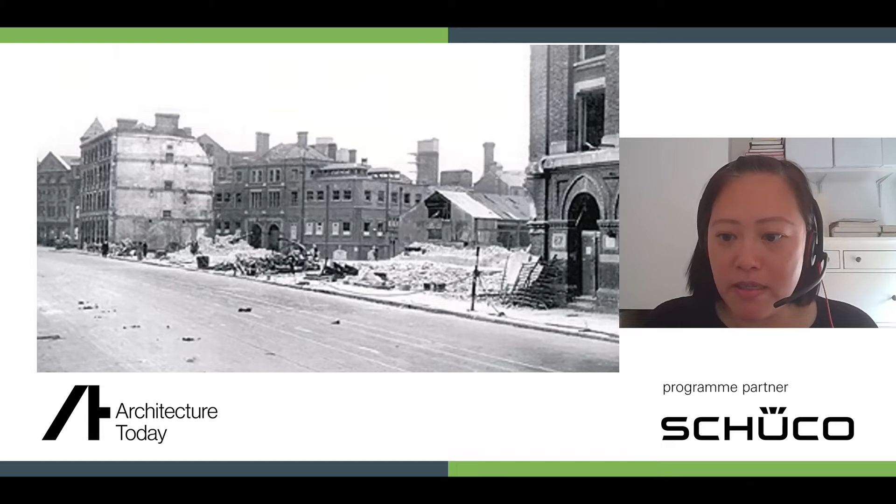and the second a Victorian warehouse with its exposed Victorian brickwork. The third to its rear is a cross-laminated timber building built in 2015. It goes to show that the binary approach of conservation versus decarbonisation would not be a straightforward debate.

When Architecture Today invited me here to speak, I asked myself how I can contribute to this discussion. After all, I'm a practitioner, learning daily from the experts around me, and do not purport sustainability as my expertise.

From a young age, I had a sense of material use and waste, and I was cultured to be a thrifty person growing up with my grandmother and her practice of saving tin cans for storage and reuse of pots for growing. I was taught how much energy and resources goes into making something, and that reuse was paramount. That same consciousness carries through to my work 40 years later.

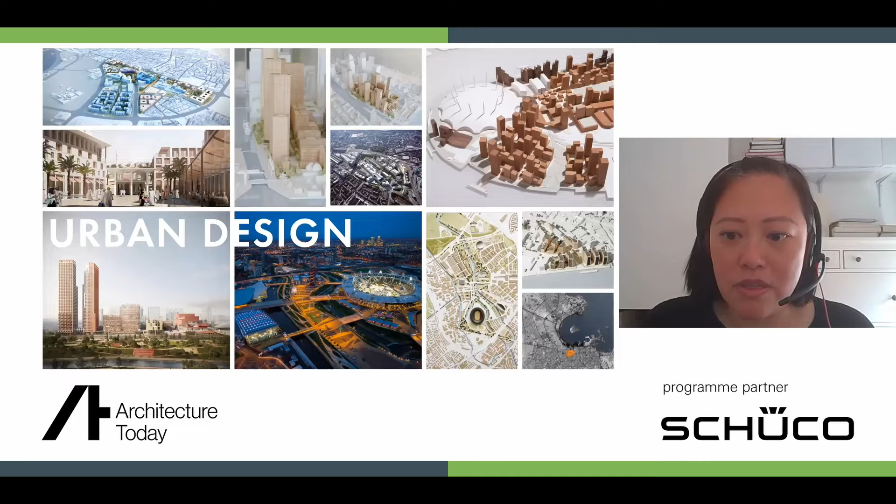The question of whether something is necessary and if something is of value, should it be retained, and how its use can be extended. Our practice has worked across many sectors, from retained to new, garnering over 42 RIBA awards. My work over the last few years has primarily been in urban design, residentials, and workspace.

From Imperial College, Greenwich, Brent Cross, and King's Cross, I've seen through my work that design is not just a carbon issue, but social and financial considerations too. The King's Cross Master Plan touches on many of these themes.

Though it once was a thriving hub for goods and transport, by the 1980s, it was a disconnected and derelict piece of city, making getting through and to it difficult and unpleasant despite being in the center of London. Working with Argent and Dimitri Porphyrios, the master plan sought to bring back a more sustainable and intensive plan, with walkable places and infrastructure that can extend its lifetime.

Just like the Victorian infrastructure, the green spaces and network of streets and the upgraded services below, it aspires not just to be of the 60-year typical lifespan, but to 200 years of investment. The plan also sought to retain existing buildings that are of value to continuing its living history.

I worked on the early stages of the German Gymnasium, built in 1866. It is a key piece of British history. I learned of its cultural value as a site of the Olympian athletes showcasing sport within London.

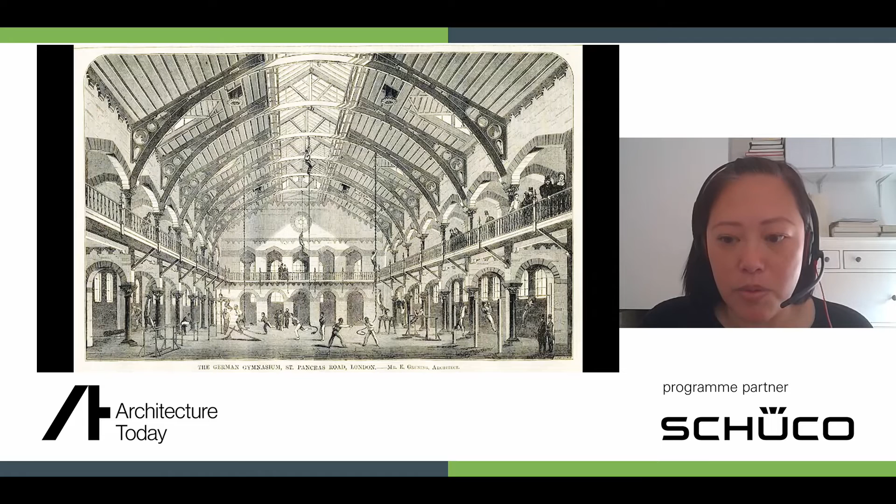Through careful documentation, repair, and adaptation, we renewed its use. It is now a restaurant showcasing German cuisine for all to enjoy. And it also activates a key public square outside King's Cross Station.

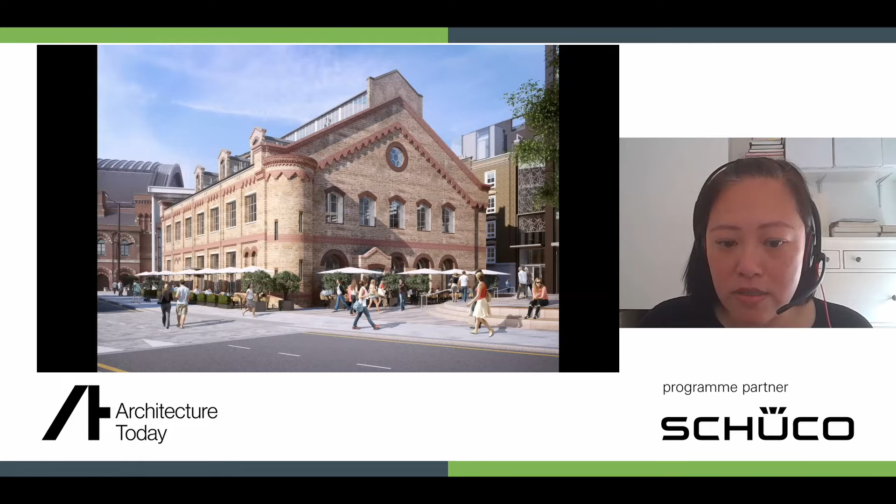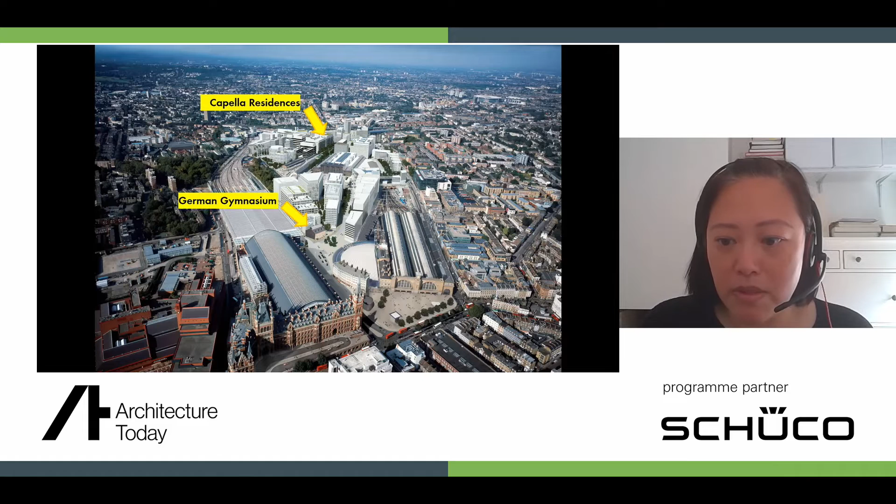20 years after the inception of the master plan, I now lead a project team designing the last building of King's Cross. It is a new residential building that will provide 176 homes for residents on the site. The building is designed to use 100% renewable energy through green gas and electricity, becoming a carbon neutral estate.

The scheme is designed to BREEAM Excellent with Code for Sustainable Homes Level 4 requirements for responsible sourcing, site waste management, and efficient material use through prefabrication. It also uses WELL guidance for ensuring good access to green space, daylight, sunlight, and ventilation.

These performance measures are sometimes harder to achieve with retained buildings, and given in this context where the site previously held derelict sheds, the new building provides a new life and homes to the site for many decades to come.

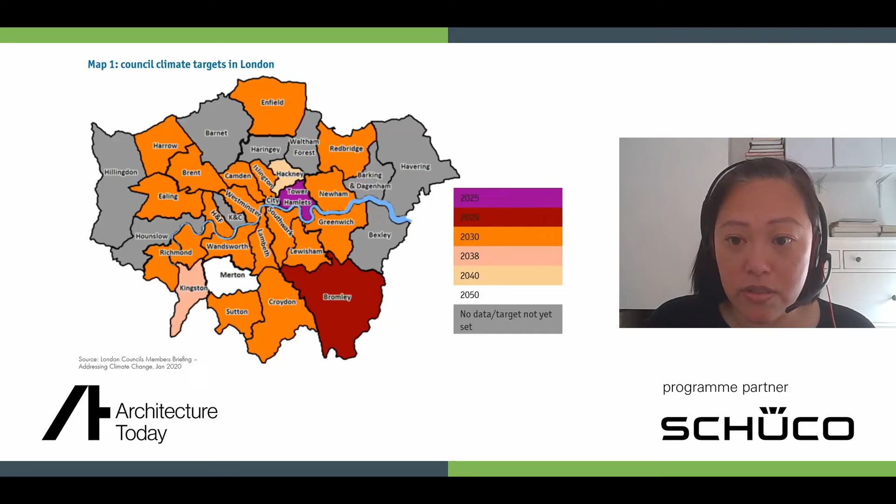Around 300 councils have declared a climate emergency to reduce their own carbon emissions and to take part in climate change. Retention and reuse may be a solution advocated, but its true impact and cost is not always understood. Retrofit is decades old. Allies and Morrison have been engaged in retrofit for 30 years, and it comes in varying degrees.

The different shearing layers of construction have different lifespans. It is not just a question of old or new, but degrees upon which one should approach a site, and it involves analysis of its social, environmental, and material legacy. Reuse can span from retention of facade, its superstructure, upgrade of its systems, or its cultural assets.

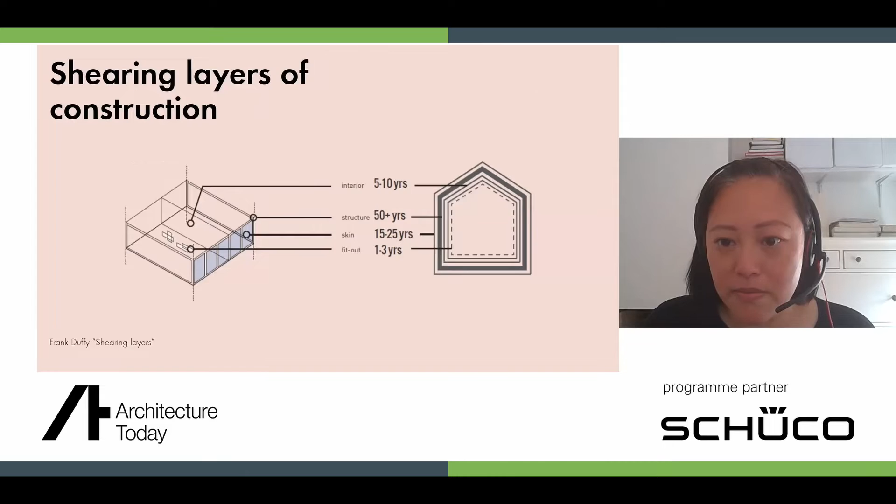Like our crane building, which had a facade replacement, or our work at Royal Festival Hall, which was much more involved. This is not an easy task, so our work is informed by the LETI Guide, by the London Energy Transformation Initiative, which our head of sustainability at Allies & Morrison, James Woodall, leads in our contribution to support its transition from London built environment to net zero carbon.

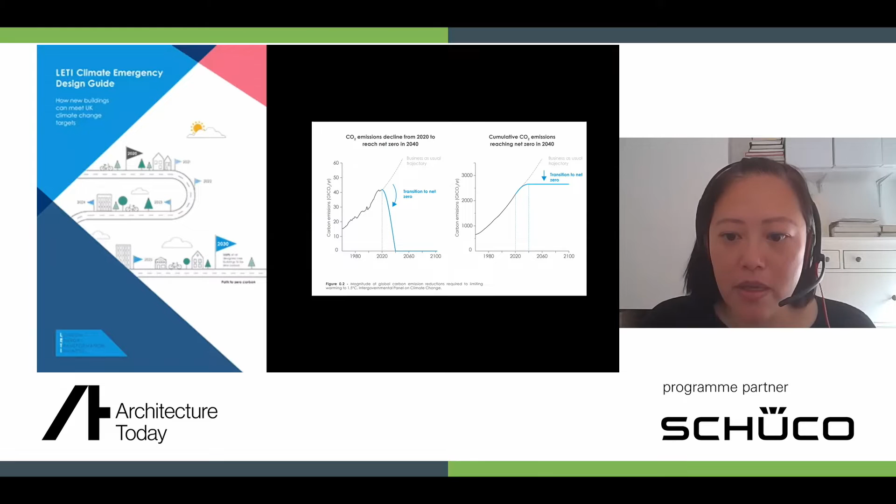The key is whether the carbon payback is achievable in 10 years to limit global temperatures from exceeding 1.5 degrees above pre-industrial level. One is always aware of the impact of new construction and the emissions for demolition.

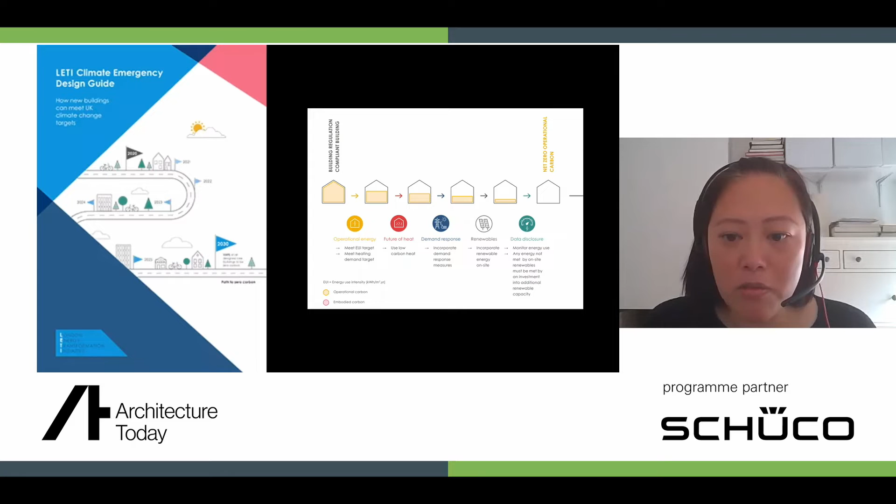When approaching a new project, we review the context and the existing buildings if it's there. There is always a dilemma of whether the extent of design life of either the retained components or the proposed new build will last. And will it be best practice for embodied carbon, but also is its operational carbon in line with climate change targets?

We have a duty to ensure buildings do not become prematurely obsolete, protecting these assets and assessing whether they're resilient to future change. It's really important. Allies & Morrison have invested in this duty with the creation of our upfront carbon tool. This not only allows us to calculate the environmental impacts associated with new development, but also an ability to view this impact against a retrofit option where existing buildings exist.

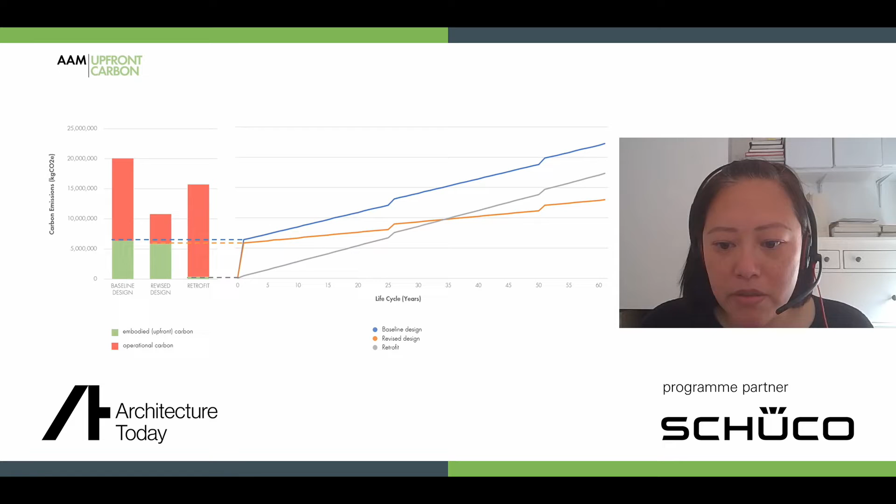We have a role to play to assist our clients in setting briefs and strategies, to prompt our design teams and outline to planners, stakeholders and policymakers what to expect. If after analysis, new, to whatever degree, is a solution, then we, designers, consultants, clients, and councils, should be held to the highest standards to maximize its efficiency, its social value, and its responsible use, to ensure it is a positive investment that lasts for future generations and the planet.

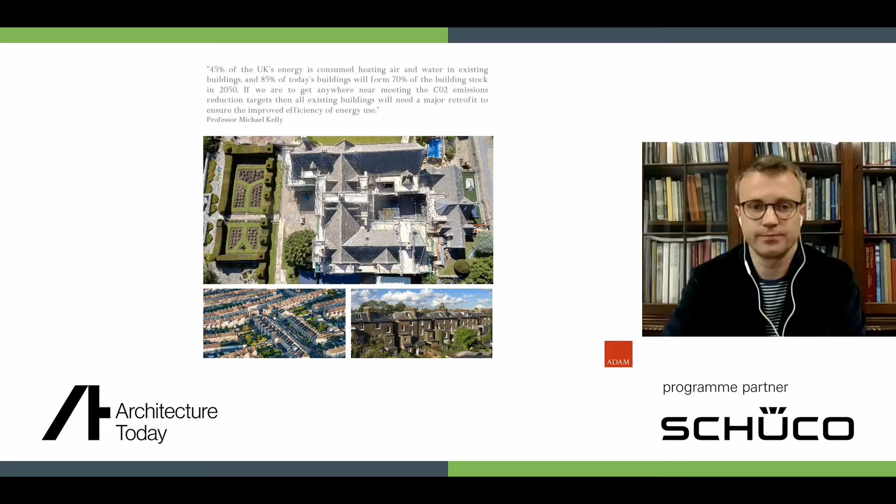This is a Grade 2-star manor house in the Cotswolds, and I show this as an example of how we can upgrade a historic building for the future, and how adaptability for renewables and a changing energy supply can be achieved. This is a private home dating back to the 15th century, and it'd been on the market for some time. It looked as though it might not even get sold, and it could potentially fall into disrepair.

An overseas client saw an opportunity to purchase and convert from a private home into a private institution. For those less familiar with the uses, the institutional use meant that they could still use the property as a private home, but they had the benefit that it could also be used as a quiet retreat for guests of the clients and also their foundation, which promotes the arts and sciences.

We took a fabric-first approach, which included major repairs, removal of asbestos, and modifications to the layout to undo generations of incremental change, which quite frankly resulted in a pretty confusing experience. We undertook a staggering amount of historical research, dating the property, understanding its incremental phasing, and more historically significant interventions. The most recent works had been carried out in 1925. It was our mission to understand and fully evaluate the building before developing early design. The building became the client.

From a practical perspective, historic projects also provide a testing ground for interventions, contributing to thought leadership, research and development. It's a balance of protecting the historical significance, but also securing its future to ensure it can survive.

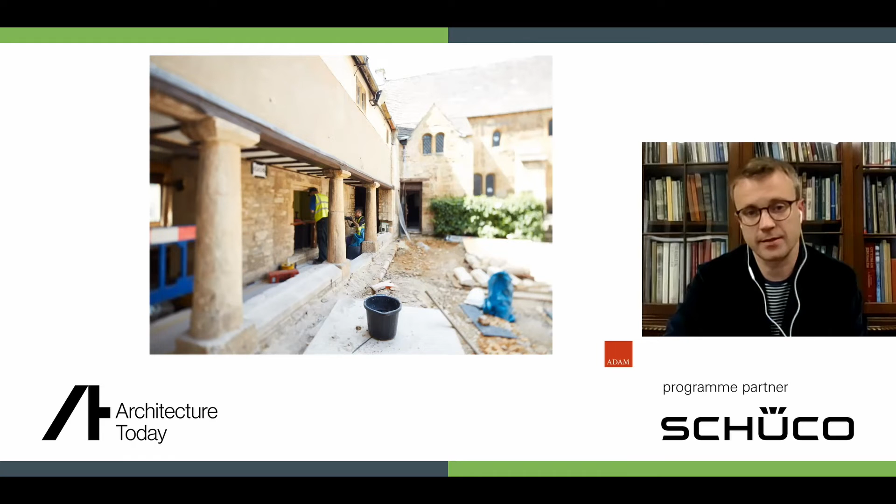So to conclude, my position is that conservation can be hugely beneficial to working towards net zero, and the lessons learned from upgrading the large historically important buildings can be applied to the 85% of the existing buildings which are likely to be with us in 2050. I'd like to see us talking about avoided carbon, discussed alongside embodied carbon and operational carbon, and quantified with the same amount of importance.

Nobody wants to be in a bad building, and it's a question of huge balance. But we need to understand the carbon cost of replacing poorly performing buildings with incredibly energy efficient buildings. If this takes us beyond the tipping point and we look at the timeline of the carbon payback, it's a little bit concerning if we're in a position where we're already in a climate catastrophe. This is why it's been said, and I'll say it again here, we can often think of the existing buildings as being the greenest buildings.

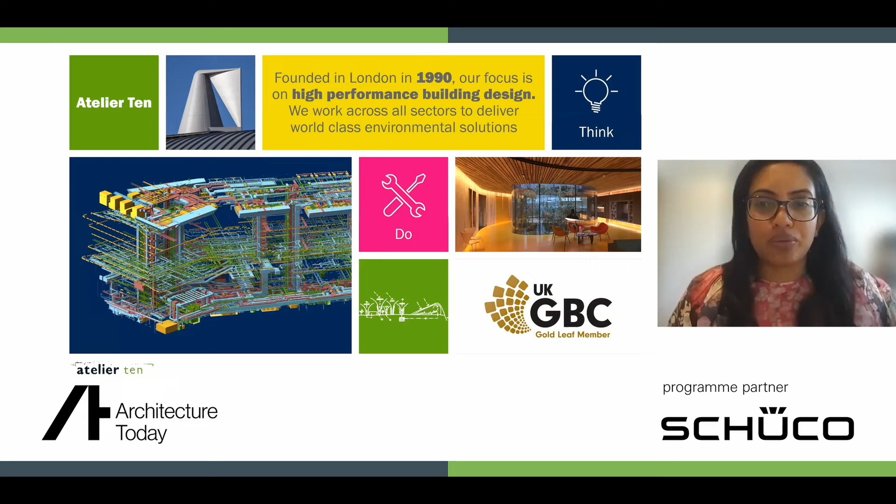So welcome today. My name is Geeta and I'll be speaking on behalf of Atelier Ten on adapt and reuse: conservation versus decarbonisation. So Atelier Ten was founded in London in 1990. Our focus is on high performance building design. We work across all sectors to deliver world-class environmental solutions. Each year we offset 100% of our CO2 emissions as a company. We are also a Gold Leaf member of the UK GBC as well.

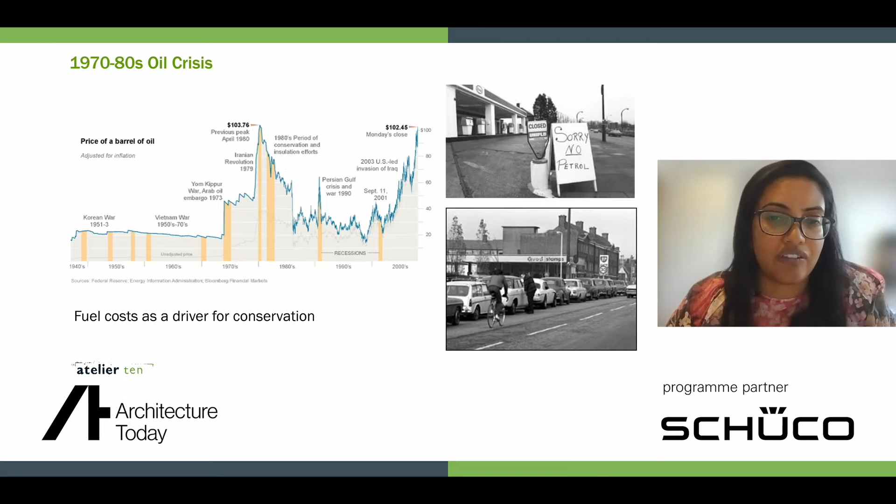So in 1972, if the present growth trends in world population, industrialization, pollution, food production, and resource depletion continued unchanged, the limits to growth on the planet would be reached sometime within the next 100 years. In the 1970s and 1980s, there was the oil crisis, so there was a driver for fuel cost and a driver for conservation of fuel as well.

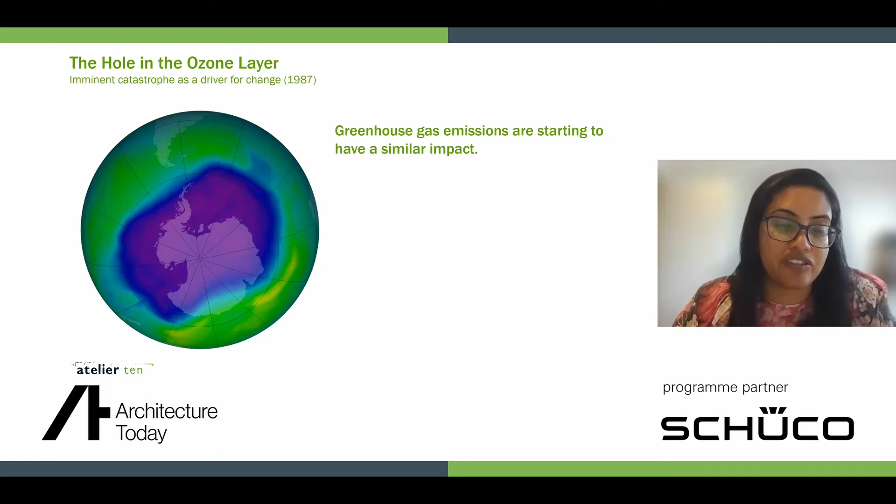So in terms of the hole in the ozone layer, there was an imminent catastrophe as a driver for change in 1987. Greenhouse gas emissions were starting to have a similar impact on the hole in the ozone layer. A new awareness of the impact of humans on the atmosphere was detailed at that time, and the consideration of global warming, GWP, as a key issue was also highlighted. Refrigerants and insulating materials were particularly affected. So change is visible. You can see it today in many parts of the world.

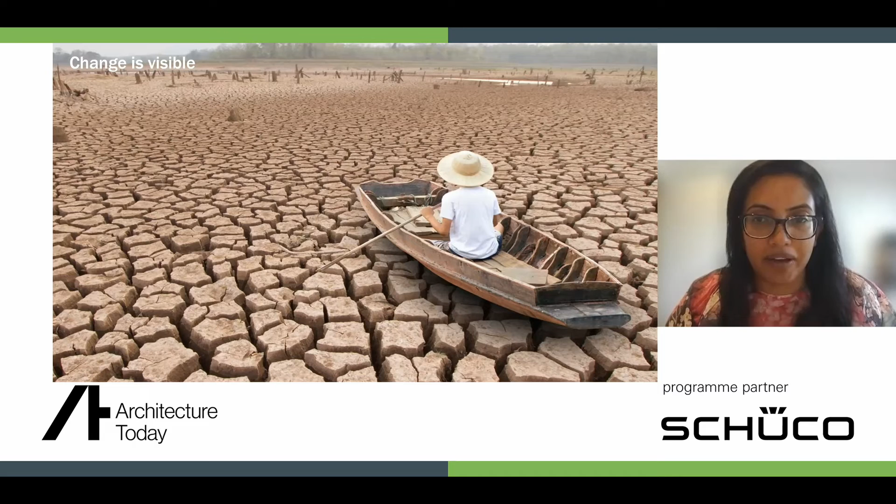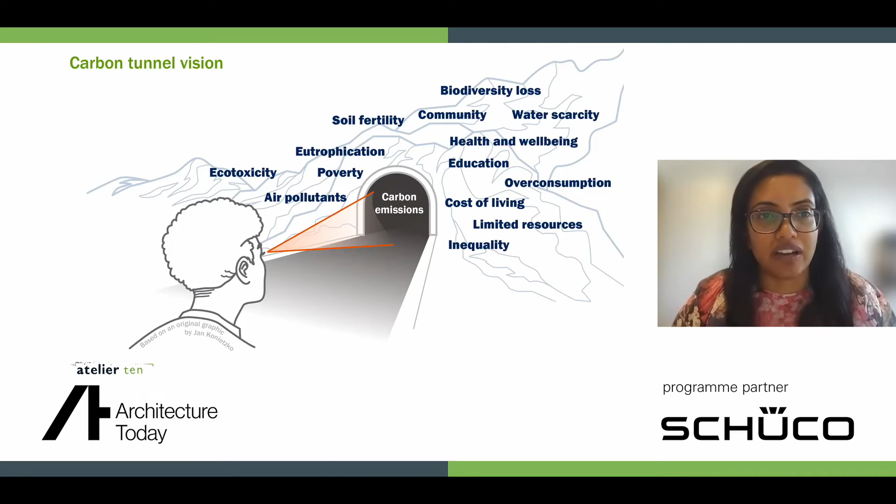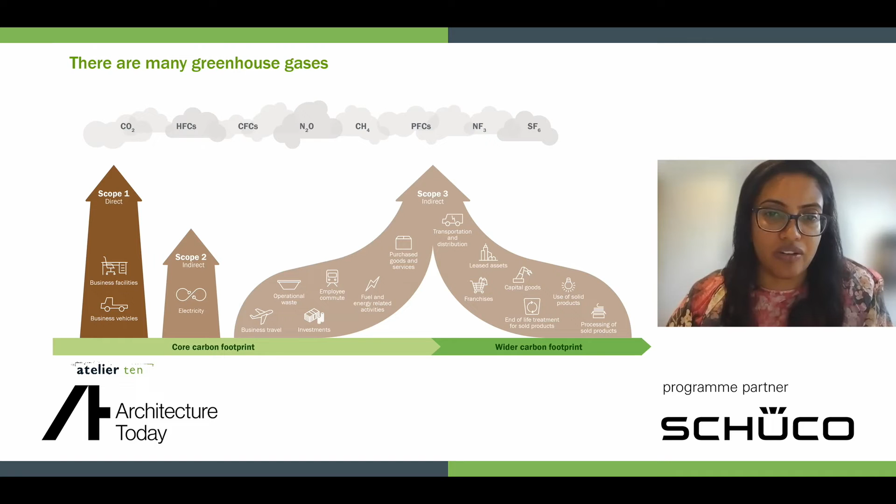So in terms of conservation and decarbonisation, there is no straightforward way of thinking about it. Conservation protocols differ according to the age of a building, the methods and materials used in construction, and specific locational factors. Currently, in terms of carbon emissions, there's a tunnel vision on how to actually equate and look at how you provide a rateable target. There are many greenhouse gases as well. So there are HFCs, CFCs, N2O, CH4, and looking at the whole carbon cycle will help reduce overall carbon factors.

So as a company, we look at embodied carbon. Why do we look at embodied carbon? Embodied carbon is the amount of carbon that's emitted during the construction of a building. The extraction of raw materials, the manufacturing and refinement of materials, transportation, installation, and disposal of all supplies can all produce embodied carbon emissions.

In 2019, the UK government signed a legally binding target to achieve net zero carbon emissions by 2050. 80% of the buildings of 2050 have already been built, so decarbonising these buildings will play a vital role in the UK's journey to net zero carbon. There's no one-size-fits-all approach, but with the range of technologies available today, solutions are there to be found.

The UK GBC has led the way in the UK property sector in defining what we mean by net zero carbon. Its document, Net Zero Carbon Buildings: A Framework Definition, was published in 2019. This defines the principle that achieving net zero is about reducing demand both for energy and materials, with offsetting the last resort for residual emissions.

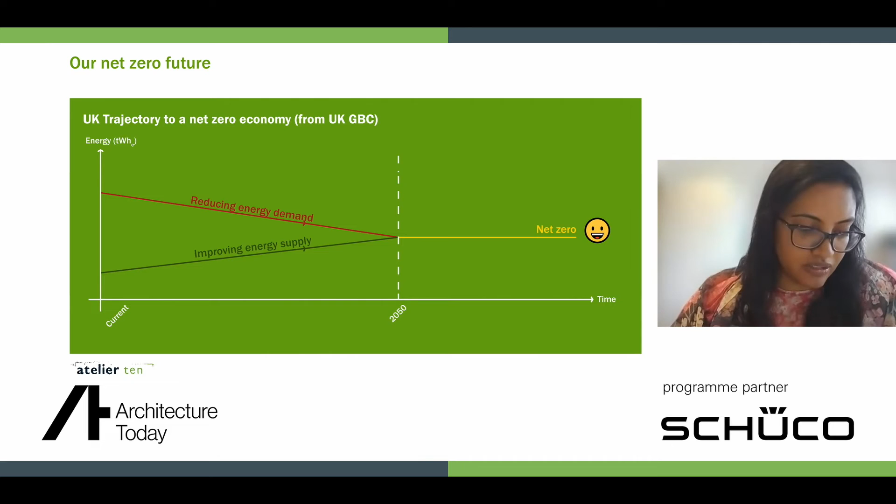The UK GBC defined a target trajectory, as seen on the screen, for operational energy efficiency for commercial offices, which can be applied across the property sector. To be net zero carbon by 2050, we need to reduce our buildings' operational energy use intensity by more than 60%. While the details of the calculation may change over time, the scale of the challenge is very clear.

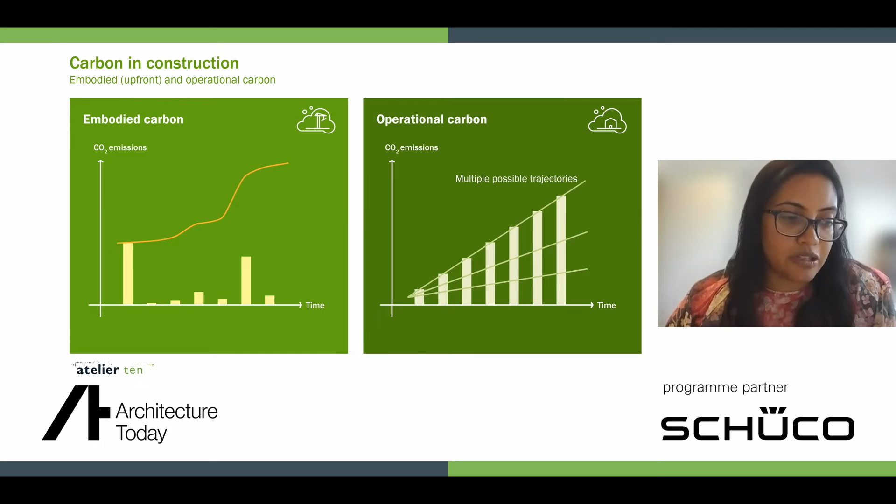So in terms of embodied carbon, which is the upfront carbon that you have to look at, there is also an awareness of operational environmental impacts, which is increasing rapidly among some commercial occupants, particularly larger organizations with internal sustainability commitments. Achieving operational net zero carbon requires a partnership between owners, occupants, and operators. Operational carbon is not just about design; it requires a combination of the right design, facility management, and occupant behaviors.

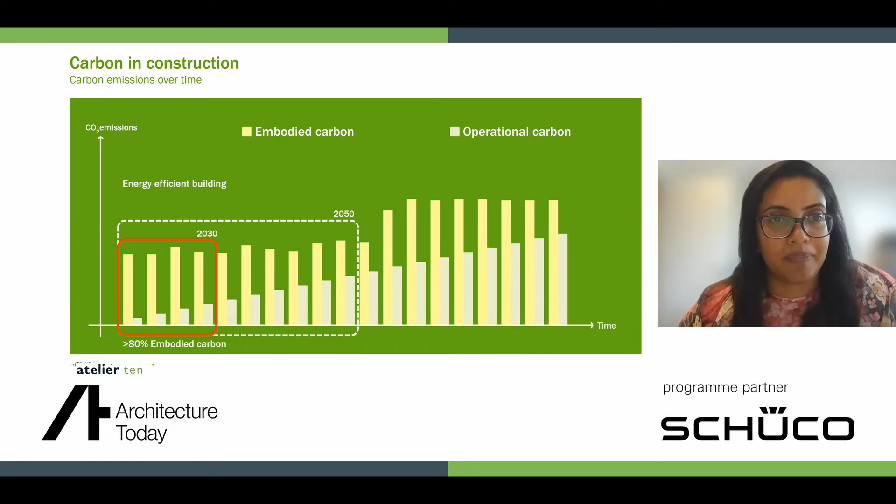So the graph in front of you shows by 2030 the greater than 80% embodied carbon, and how operational carbon and embodied carbon would be targeted over time. So in terms of actually meeting LETI's carbon targets, getting the balances right and avoiding unintended consequences is best done with a holistic approach that uses an understanding of a building and its contents, its significance, and all factors affecting energy use from the starting point to the end,

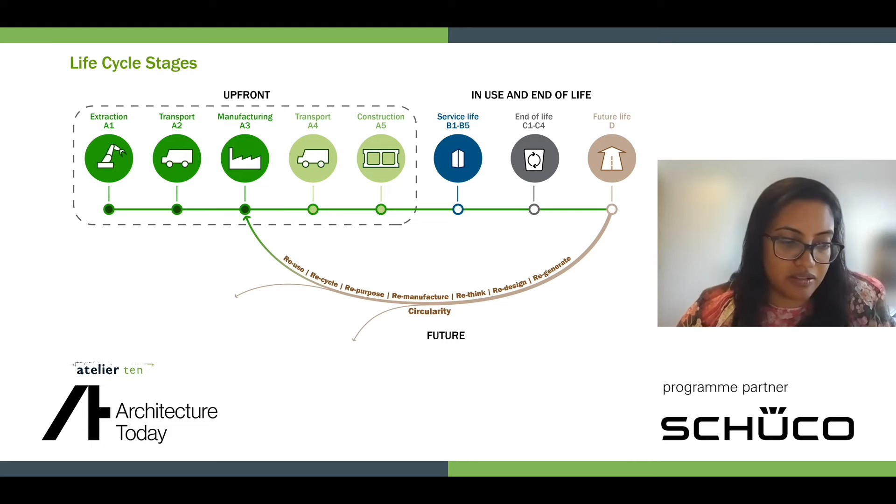and looking at the future as well. A building uses resources such as energy, raw materials, water, etc., which generate waste and are potentially harmful to the atmosphere. Embodied carbon emissions arising from new building constructions or refurbishments can represent a significant portion of a building's whole life carbon impact. The goal is to reduce all carbon emissions to net zero through the life cycle of the project. So some hotspots that you could target as part of embodied carbon are design and optimization, and reducing, reusing, and recycling materials, thus decreasing embodied carbon throughout the life cycle of a project.

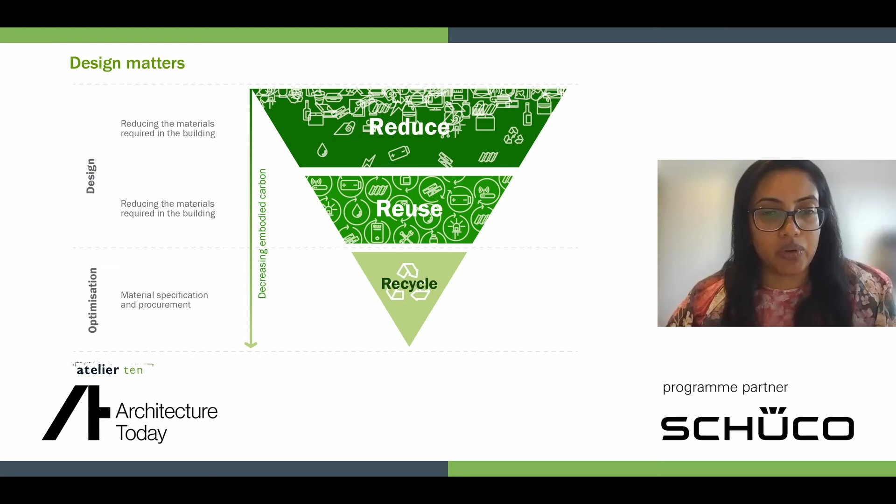So in terms of height, embodied carbon, if you look at height of commercial buildings or reuse of existing commercial buildings, goes up dramatically with the building height as well. Building height influences energy consumption directly through mechanisms such as changes in external temperature, wind speed with altitude, access to daylight, solar gains, as well as the need for lifts.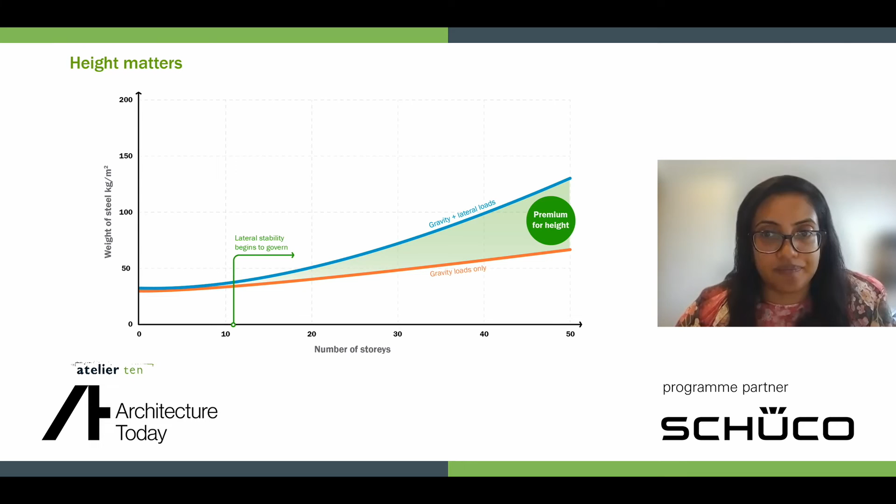So in terms of upfront carbon, how an assessment could be detailed is looked at the MEP, the furniture, fixtures and equipment, finishes, facades, superstructure, temporary works, external works, and substructure. The LETI best practice, Band C, targets 600 kilograms of CO2 emissions per meter squared on the GIA.

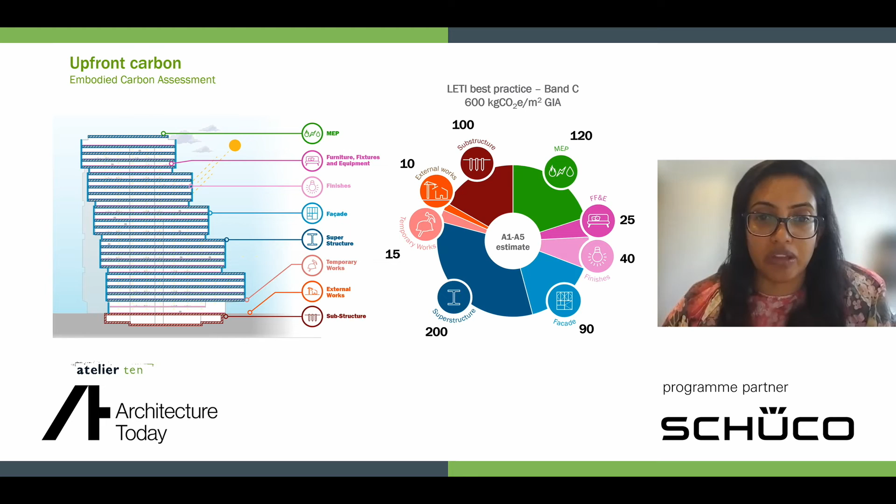So another hotspot to target is structural embodied carbon. So moving the dial on loving columns, specifying low carbon steel, building lightly, reusing, building cleverly, innovating the building, and building efficiently.

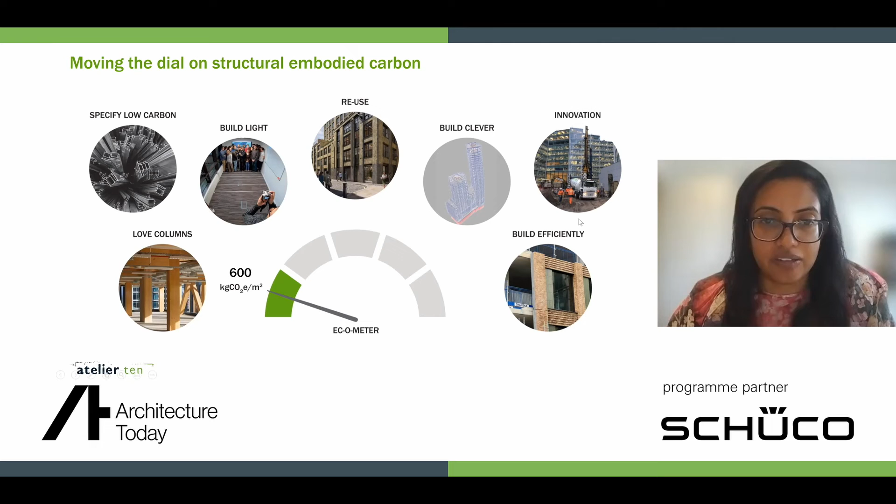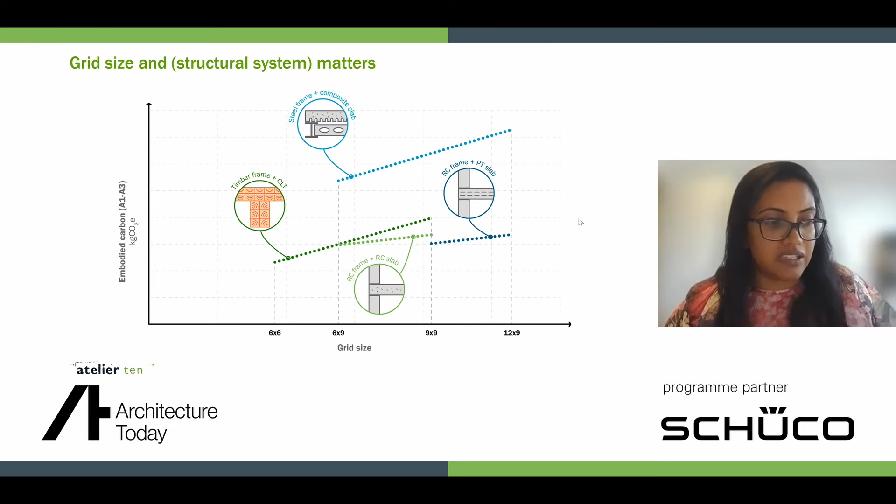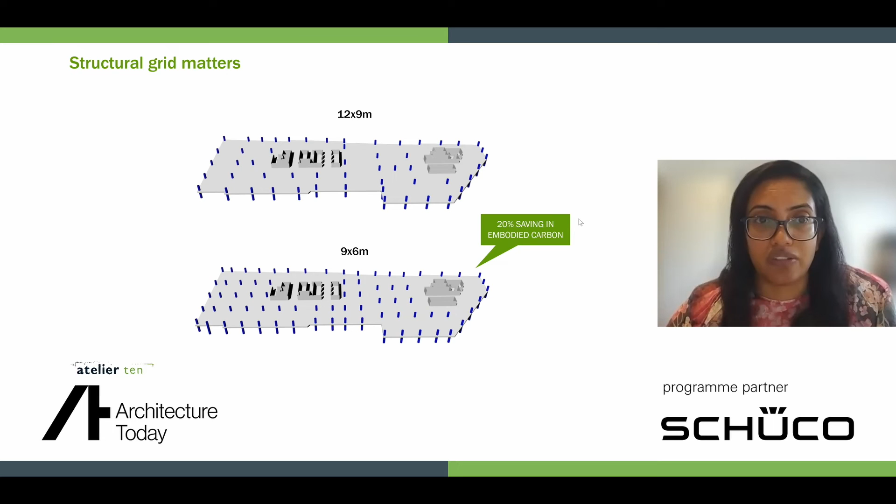The grid size also matters. So a 6x6 grid, for example, will have a lower embodied carbon on an A1 to A3 type setting versus RC frame PT slab. So that's one area that could also be targeted in more detail. Again, looking at some of the buildings we've been working on recently, there's been a 20% saving in embodied carbon, looking just on the structural grid itself.

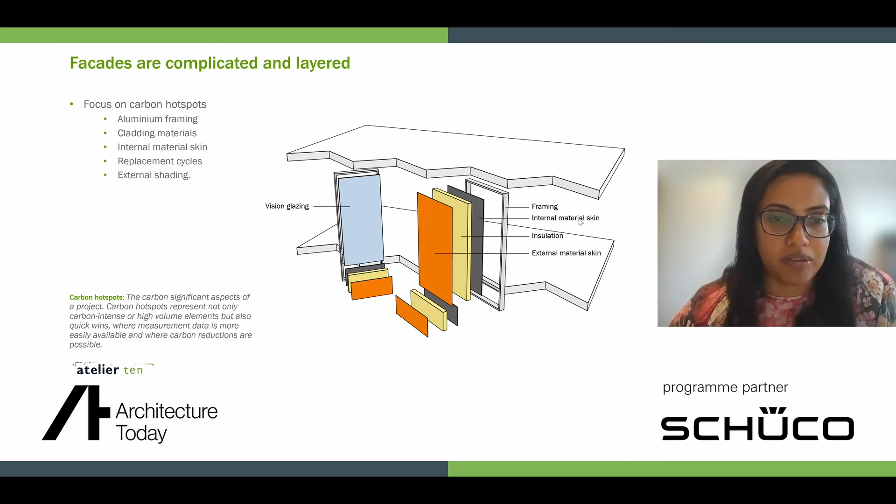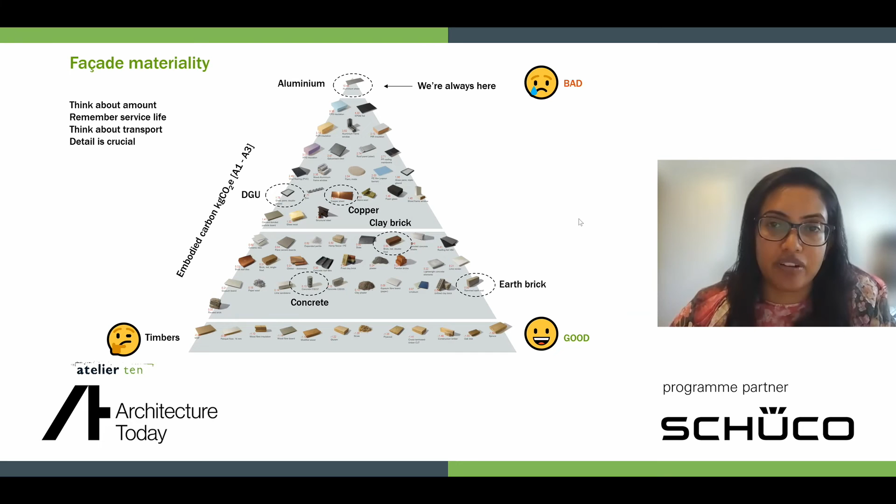Another key area is facades, which are also a hotspot within buildings. You could focus on aluminium framing, cladding materials, internal material skins, replacement cycles, and external shading. There is a significant aspect on projects of the facade being complicated, so detailing of the facades would generally reduce carbon where possible. And materiality, think about the amount, remember the service life, think about transport, and as I said previously, detail is very, very crucial.

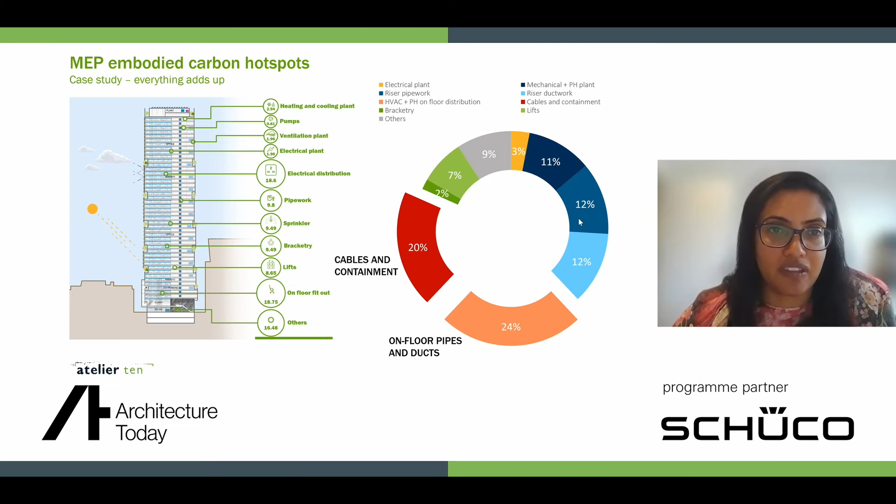So in terms of emerging practices and technology, there's been a recent project by Atelier Ten, which is called the AA at Hook Park, the Big Shed. It's a 500 square meter assembly workshop building erected in Hook Park, Dorset. The project demonstrates the potential for using low-value local timber in and around its area. The AA Wood Lab will advance the role of woodland campus in Hook Park and also reduces embodied carbon and operational carbon.

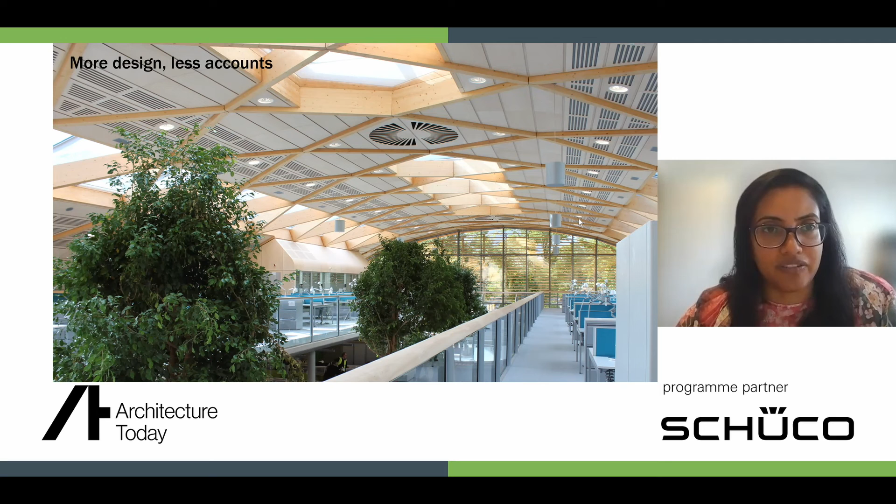In conclusion, more design accounts for less, and reuse and decarbonisation assists in construction and could help progressing to net zero carbon by 2050. So what might be the future? The greenest building is the one that already exists, rather than actually rebuilding new buildings.

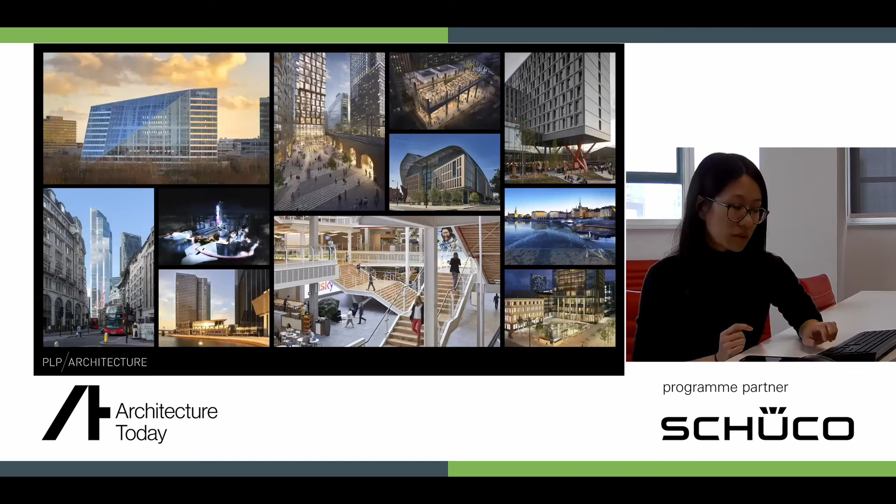So today I'm just going to run through 3 case studies on this subject, some quite different projects, looking at how we evaluated the site and the brief in order to come to a conclusion whether or not to reuse or adapt the particular project. So at PLP, we evaluate all our projects individually, taking into account site context and brief when we're undergoing these kind of considerations. So the 3 projects that I will run through are Corso Como Place, which is in Milan, Italy, an office building, Cleveland Clinic, which is based in London, which is a healthcare centre, and Holborn Viaduct, also based in the City of London, an office development, which has just gone through planning.

So the first case study is Corso Como Place. As I said, this is based in Milan. So the original building seen on the left was in a very prominent location, but very underutilised at the time. It did undergo a refurbishment already in the past few decades. And when we approached the site, there wasn't necessarily an option for demolishing the whole building. The idea was that we had to keep the superstructure and the substructure. It just so happened that this was the largest embodied carbon proportion saved.

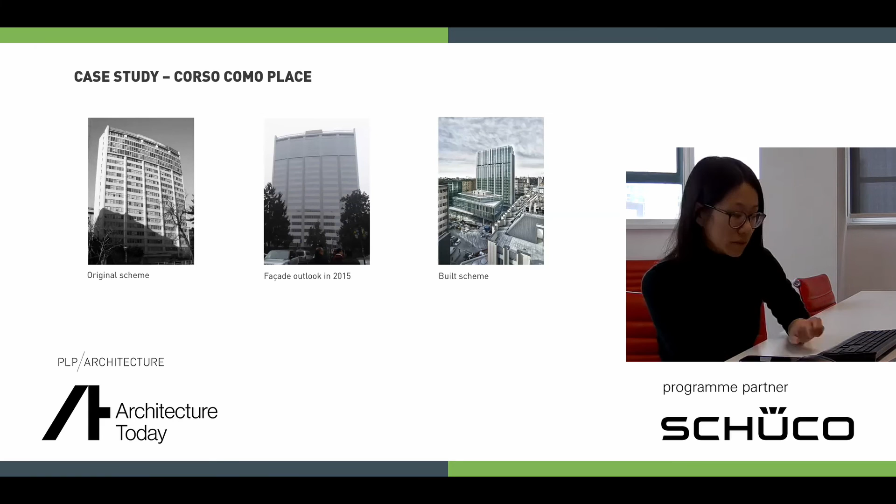The next project is slightly different in terms of the use. So this existing building in London is a 1950s neoclassical facade. It's based in a conservation area, so there were limitations in terms of what we could do in terms of the facade. The idea is that we had to retain the facade because of conservation.

There again was a refurbishment done in the 90s from the existing building. This turned it into an office use, and because of this refurbishment, there actually was a misalignment between the structural slabs and also the facade. So in order to turn this into a clinical use, we ended up retaining the vast majority of the facade, about 60 to 70% of it, redoing the interior, the structure, in order to level it on the ground floor and also to provide better spaces within.

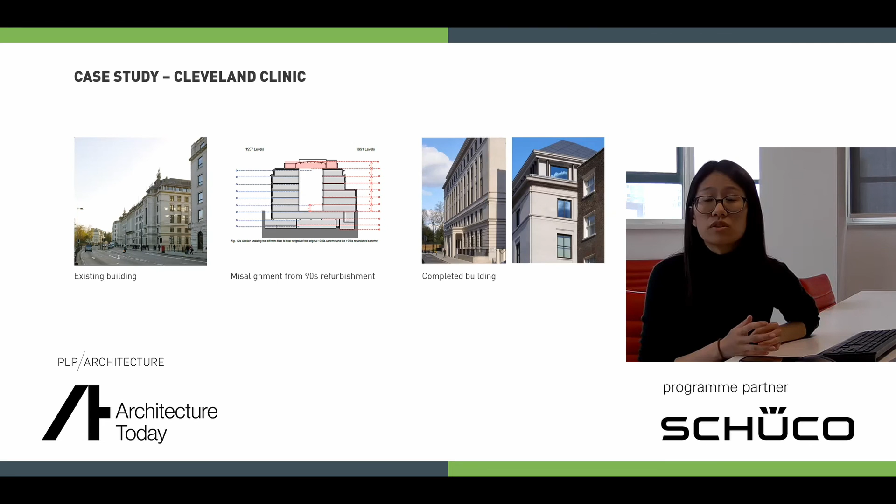And with the existing facade, massively improving the thermal performance of that as well. Obviously, there were some limitations in terms of how much additional insulation we could use onto the existing facade, just because of the huge facade build-up. So this was a challenge, trying to balance the building performance, but also the new use, making sure that it was still usable for the main functions of the clinical centre as well.

And the last project is Holborn Viaduct. So this is in the City of London. There on site were 3 existing buildings, all offices. And the brief for this was, we had a pre-let tenant, and the brief was to have a consolidated building for this tenant. So this was probably one of the first buildings that went through the whole life carbon assessment through the planning policies.

And from this process, we learnt a lot in terms of how to make sure that we are properly evaluating a series of refurbishment options, rather than do the business as usual approach where you will settle onto the new build. So this project and the scheme evolved through a lot of iterative studies, lots of stakeholder consultants, and also pre-application meetings with both the design team and the planners.

And what we realised was the massive advantage of collaboration in this project to make sure that we were considering everything as a whole, not just the carbon story, which was extremely important, but also the qualitative aspects in terms of delivering a new office space in London. So the actual carbon calculations came out that it was very similar for the refurbishment and the new build.

However, there were benefits to the new build that we could bring in terms of the thermal performance of the facade, the way in which we could use the building in terms of mixed mode ventilation, and also how we treat the design for disassembly as well, and make sure that at the end of life, when we're designing the facade, for example, it's designed to be disassembled, and also incorporating other circular economy principles, such as making sure that we retain some of the stone on the facade as well, in order to create the new facade on the proposed development.

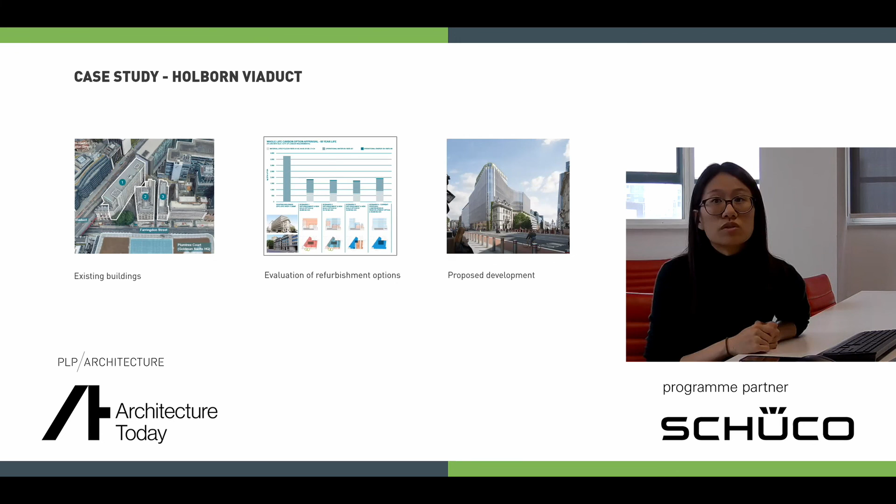So from these case study projects and experiences that we've had, and obviously with the changing climate in the industry, both in the UK and abroad, what we've done at PLP is make sure that every site and every brief that we have, we analyse it as early as possible. So one of the key aspects of the job that I have is almost like an in-house consultancy to make sure that we do early stage analysis for whole life carbon, looking at the quantitative aspects in terms of carbon calculations, when we're evaluating either refurbishment or new build.

But also making sure that when we are studying different options, we are using an iterative approach and using ways that we could substantiate claims of different variations of our building design. So whether that be dealing with buildings that are designed for occupant use, we want to make sure health and well-being and the usability of the space and the function of these buildings are as good as they can be. And we try to do that using our in-house tools and performance analysis.